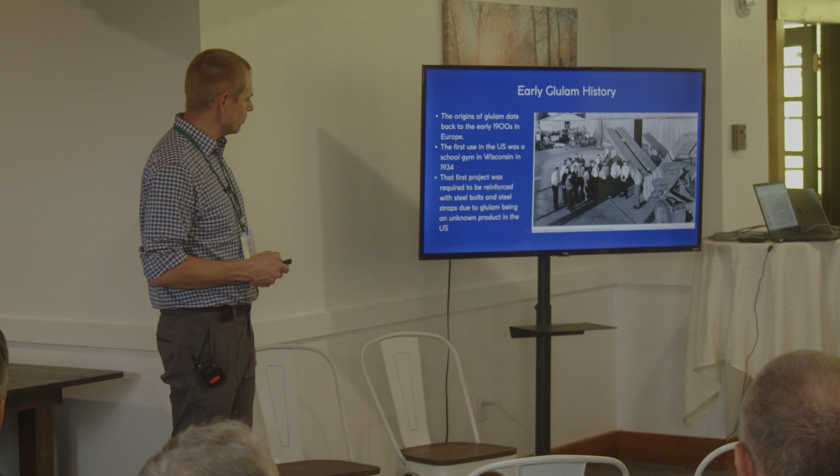So that's one of the first shots of the glulam arches being fabricated. This is that first building, that school gym, which, by the way, was built in 1934. It's still standing today. It was converted to a library at that same school in the 80s, but still functioning really well. So 90 years. Glulam's been used in the U.S. for 90 years. Pretty cool history.

This is just kind of showing you maybe the non-traditional mass timber buildings, like I showed at the beginning. These are more of the non-traditional mass timber uses, but still very traditional glulam uses, showing you the arches, curved shapes, doubly curved shapes. I'm working with a contractor right now who's working on an amphitheater project in California, very complex, doubly curved glulams. So you can do a lot with the material for sure.

In terms of the species that are traditionally used in glulam, it's really all of the same softwood structural species that we see used in 2x studs. And again, that's just because you're starting with those materials and then laminating them together. So southern pine, Douglas fir, spruce pine fir are some of the most common. Cedar is a common use when glulam is used in exterior applications. You can either pressure treat like a southern pine or use a cedar product for exterior applications.

We're going to focus a little bit and maybe get a little geeky, like I like to do sometimes, on how and why we might have different strengths of products.

Does somebody know where some of those samples ended up? They're over there. I'll take the smaller one, please. Thank you.

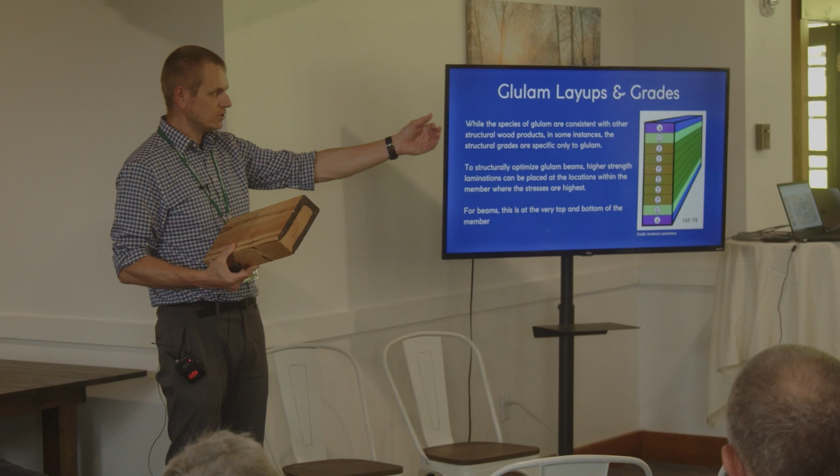So it makes sense to have highest grade lumber at the top and at the bottom for beams versus for a column. All of the stresses are the same throughout the size of that entire column, so using something that's more uniform makes sense there. And then the other sample there, it makes sense to have the same species and grades throughout because that's oriented flat-wise, so it's going to be the same load across the entire thing.

Right, yeah. Thanks, Andy.

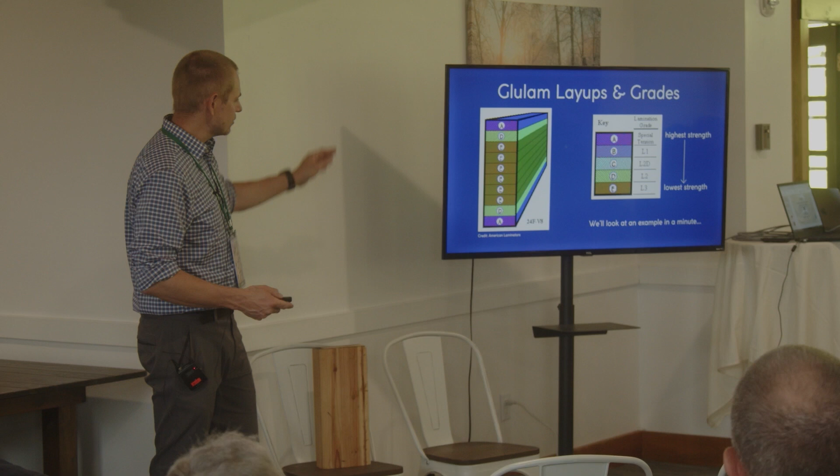So this is a Douglas fir glulam. This nomenclature here, 24F-V8, is just a way to identify some of the properties about the glulam. Won't go into the specifics here, but it kind of shows you, if you were to look at a traditional Douglas fir glulam, how would the different laminations stack up throughout that? So we're going to look at what A, D, E, all that stuff mean in just a second. But first I wanted to show those differences that I mentioned a minute ago.

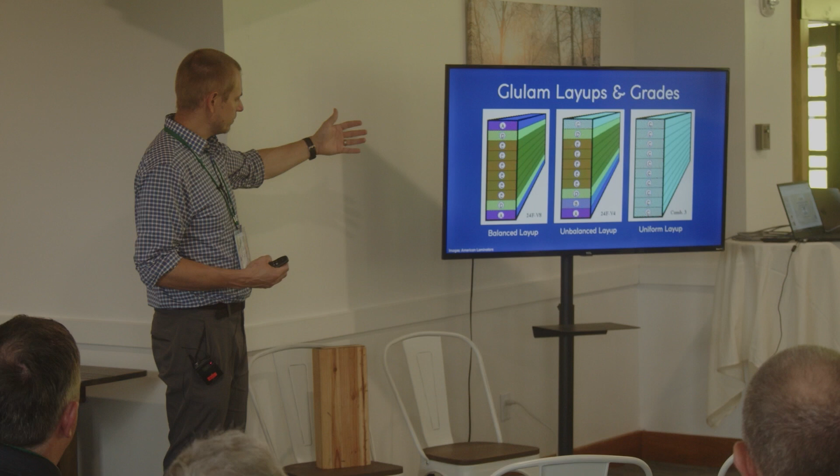If it's a beam versus a column, what is that? How do we optimize where the different strengths of lumber go? And as we think about the potential use for local species and local grades, that really is amplified because, what is the availability of all these different grades? What's the practical nature of a balanced beam versus unbalanced versus uniform layup? Because ultimately that feeds into what might be the best end cases or applications for local species that are going into glulam. So just a little bit to show you where each of these might be used best.

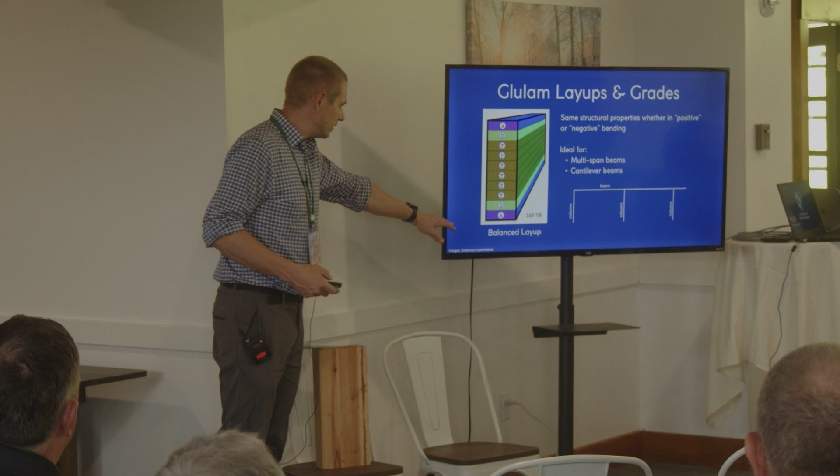So this is a balanced beam, basically meaning if you were to cut this thing right in the middle, what's on the top is exactly mirrored from what's on the bottom. It doesn't mean that it's uniform throughout, but you can see A and then D, A and then D, and then E. So it's exactly the same layup throughout. And what that is used best for is a beam that basically spans over multiple posts.

And the reason, because if it's just a beam that spans from one post to the next and the beam is cut there, it's always going to be bending. If you were to look at the deflected shape of that beam, it's always kind of like a smiley face, right? What we're really trying to do with the glulam is, I mentioned the stresses are highest at the top and the bottom. We're really trying to get the highest where the tension is. If you bend something like this, the top is in compression and the bottom is in tension. You're trying to pull the bottom apart, compress the top together.

So if it's doing this, basically the deflected shape would look something like it goes down here, then it goes back up here, down here, back up there. So it has tension at both faces, depending on where in the span you are. So that's why you would use a balanced layup. You want that high tension capacity at both the top and the bottom of the beam.

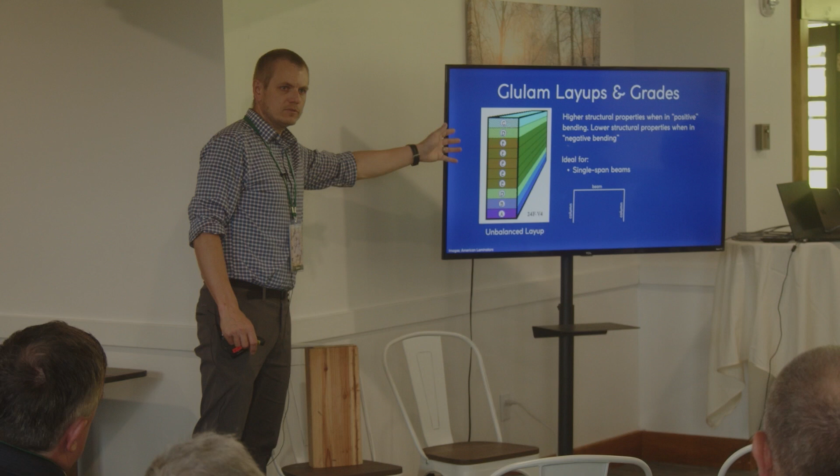Versus if it's just a simple span, like we said, between one post and the next, doesn't extend beyond, it's always going to be that smiley face. So the bottom is always going to be in tension. So this is an unbalanced layup, where we have the highest tension strength laminations at the bottom. The top is still a higher grade sometimes, but it's not as high as that very bottom. You just make sure you put it in the right way.

Yeah, they do come stamped with top on the top, and I have seen beams installed where you look up and it says top, and it's like, that's not the top of the beam. So yes, labeling and then proper installation is key.

And then a uniform layup, like I talked about, a column, that sample over there, something where you're using it in a plank orientation or a column orientation. You certainly can use this in a beam orientation, and I'll show the relative differences in properties, but this will have a little bit lower capacity than, say, a balanced or unbalanced beam, because you're using that same core lamination throughout the entire depth of the beam.

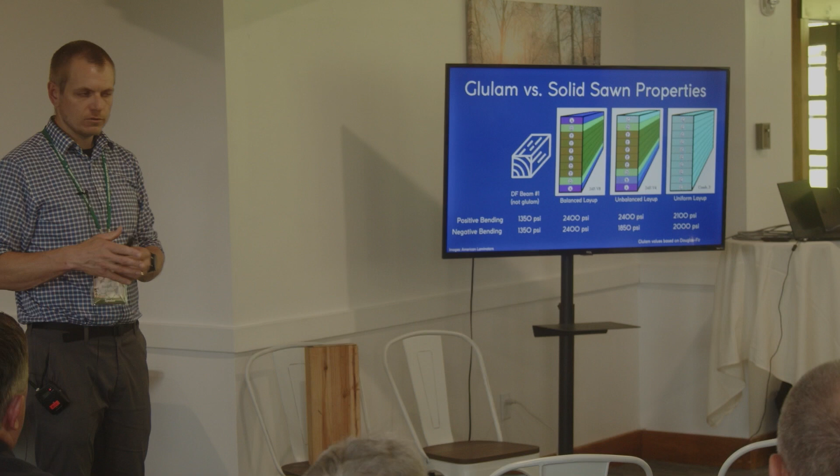Potentially. A couple of the reasons why there are these differences is the smaller the specimen of wood, the less likelihood that there are imperfections impacting the structural properties. Because, for example, knot size, wane, pitch, those things are respective to the size of the member. So there's limits on the sizes, the smaller the member is. So you have a bunch of small pieces, the imperfections on each are smaller, therefore when you lay it up, your net property is higher. So that's the main reason.

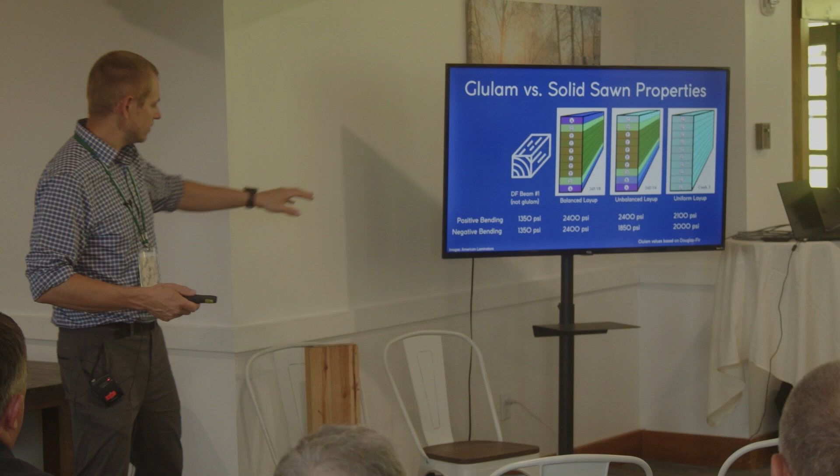So to answer your question, probably not, because this large solid sawn member is allowed to have larger imperfections, if you will. So the chance that any one small slice from that is going to have a large imperfection is higher. So the glue doesn't really have too much to do with the strength? Not a whole lot, no. It's mainly the properties of each of the laminations.

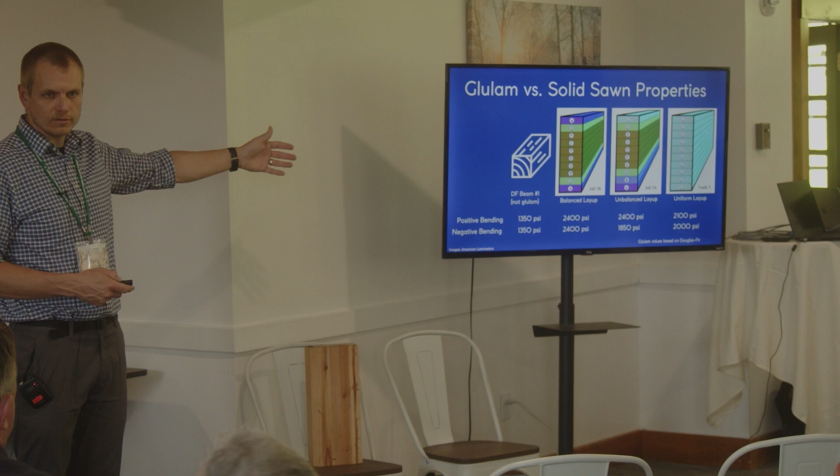The other advantage too is obviously you can create much larger sizes with a glulam, right? And longer, yeah, because they're finger jointed, exactly. So there's a couple of benefits there for sure. Smaller trees as well. Right, smaller diameter trees, because for a large column you don't need a large tree to do that.

All right, I'm going to speed up here so I don't take up too much time. If you were to use different laminations throughout, you'll start to see things like 302-20, N1D. If you go to your local lumber yard and say, I need a 302-20 stud, they're not going to be able to supply that to you. It's basically starting with #1 grade lumber and having additional requirements. For example, a 302-20 is a #1 dense lumber product with additional requirements for allowable knot size and location, allowable slope of grain, those types of things.

Basically, going back to your question about why there are differences: the more imperfections you take out of the lumber, the higher the strength is. So this is just weeding more of those imperfections out. N1D is just #1 grade dense lumber. N2M is #2 grade medium density lumber, which for most intents and purposes is just a #2 grade stud that you would find at your local lumber yard.

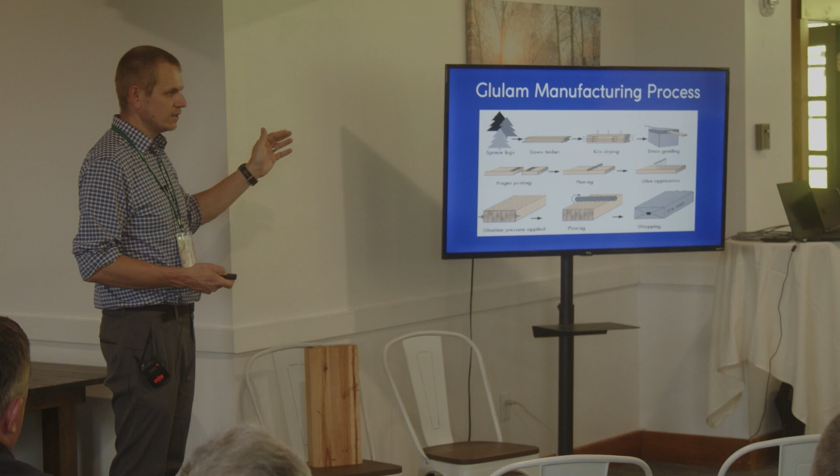How do we actually manufacture glulam? I've got a few pictures and one or two videos to show you. I'm going to show most of these going forward, so I won't dwell on this slide. If anybody's interested in a PDF of the slides, I know I talk fast, so I'm happy to share that too. So basically, it starts out with traditional lumber or maybe high-strength lumber, stockpiling a bunch of that. This is a glulam manufacturing facility in upstate New York, showing you the scale of the input lumber that goes in.

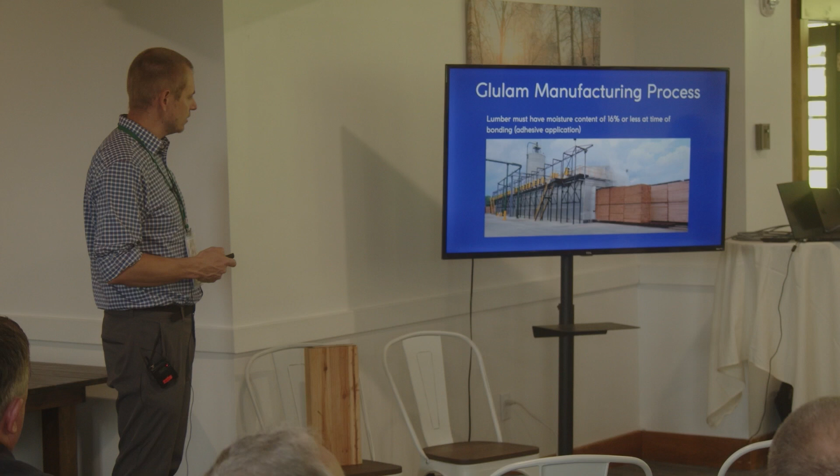The lumber is kiln dried. The glulam manufacturing spec says that the lumber has to be 16% moisture content or less at the time that it's manufactured, which is a little bit less. Traditional lumber is dried to 19%, so you do have to dry it down a little bit further, specific for the use in glulam.

Lumber is finger jointed. There was a comment earlier about how you can produce longer products, and this is why: each of the laminations in glulam is finger jointed, meaning you might start with a bunch of 8, 10, 12-foot pieces of wood, but you finger joint them to create a 40, 60-foot long glulam member, and you don't have to worry about the structural impacts of having just butt joints between those laminations. So it's finger jointed. Then it's put into a press.

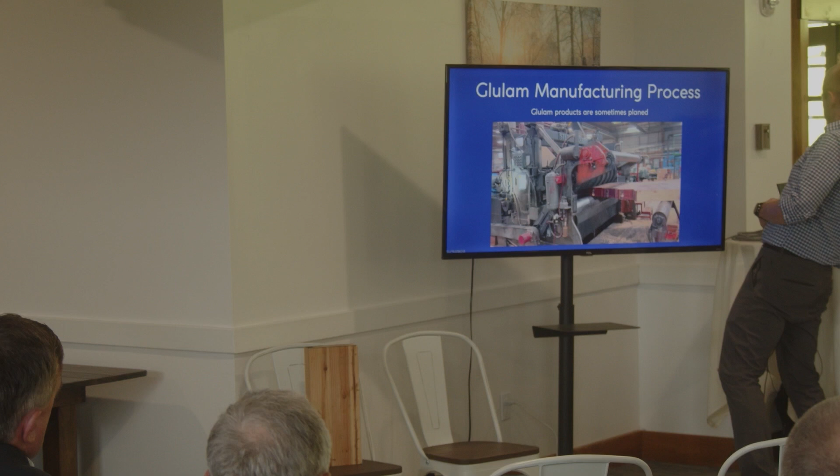I think this is a video. I'm going to try to play this real quick. Let's see if this works. Nope. I don't know if I have a mouse. Oh, there we go. Let's see if this works. I guess there's no sound, but that's okay.

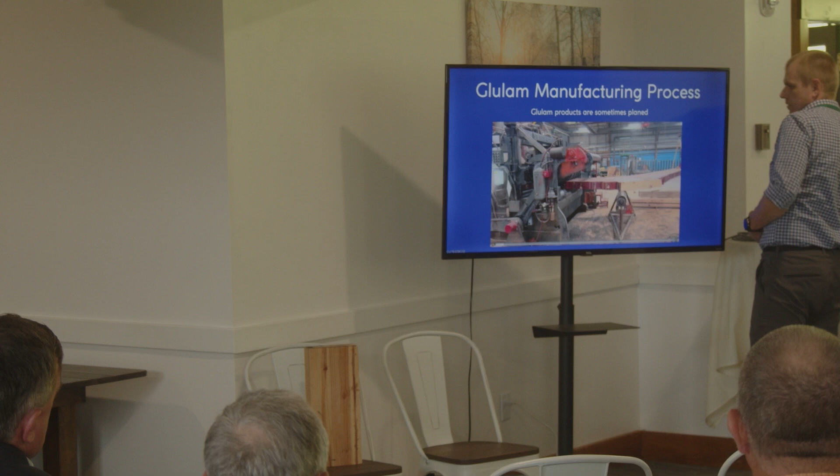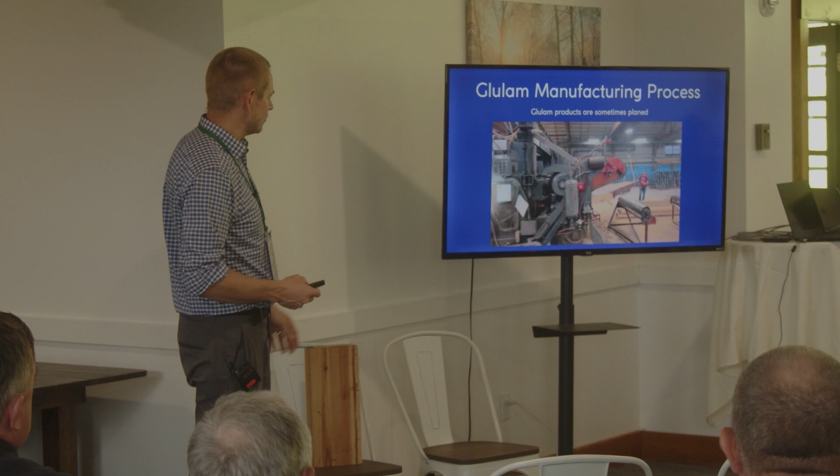So this is a planer. They're passing this glulam through the planing machine from one side to the next. It's a bit of a unique process for this one because this is a curved glulam, so they're kind of having to push it through and turn it as it goes. You can see the guy in the back. He's basically steering it, exactly. If you look closely, you can see the top surface of that glulam before it passes through the planer. It looks fairly rough.

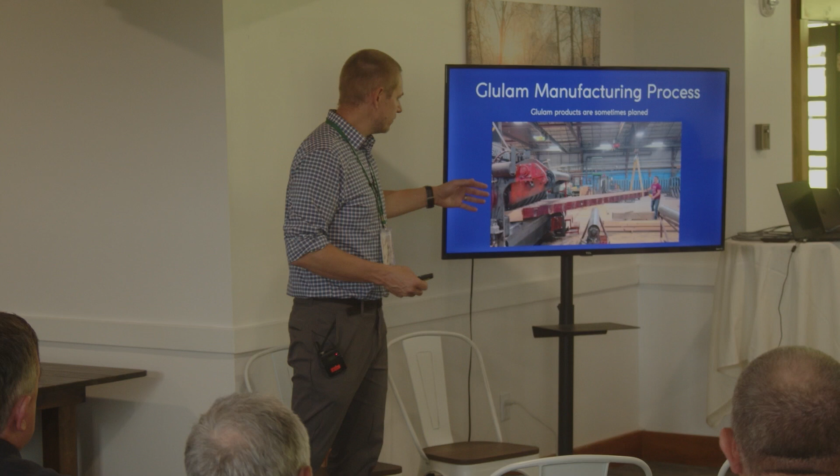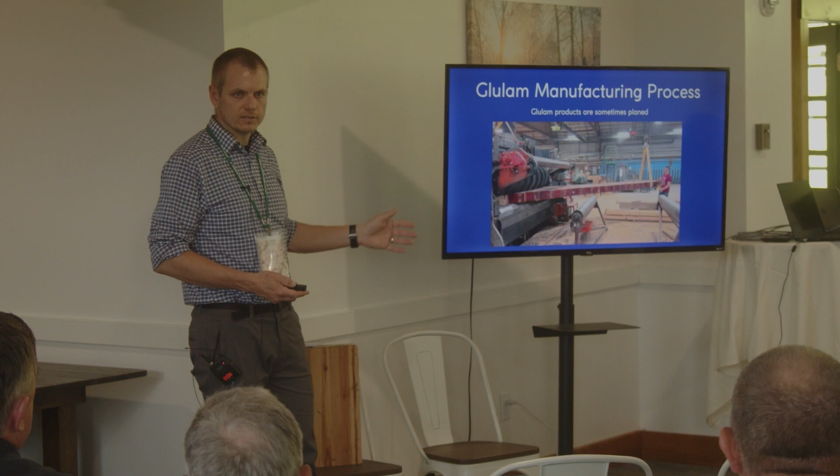And there's different appearance grades that you can get for glulam. This would be fine for a header in your garage, right? But it probably wouldn't be fine exposed for your school gymnasium. So that's how those things are varied, by the planing process and the appearance grade. So this would be like Unadilla? Yeah, that's who that was from.

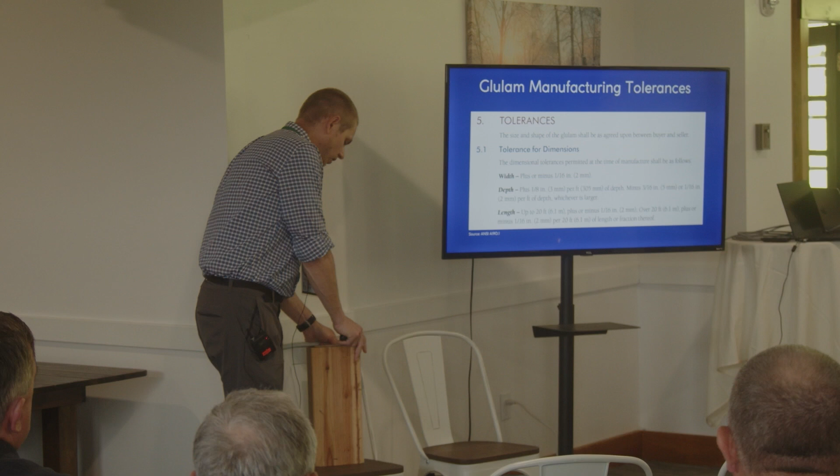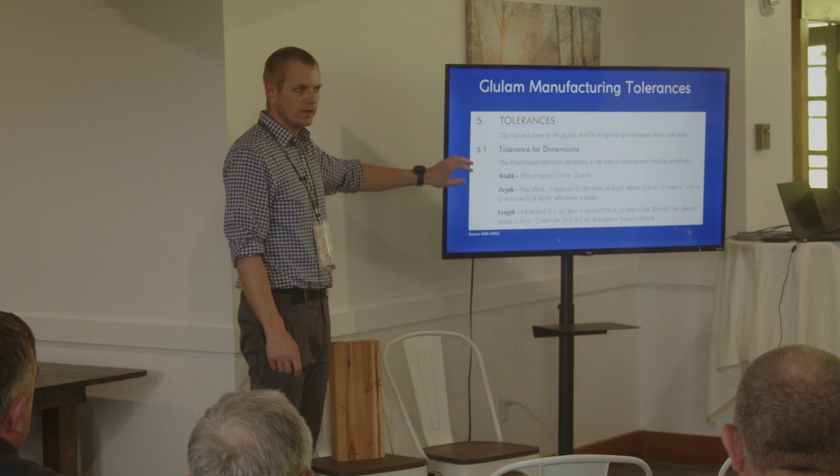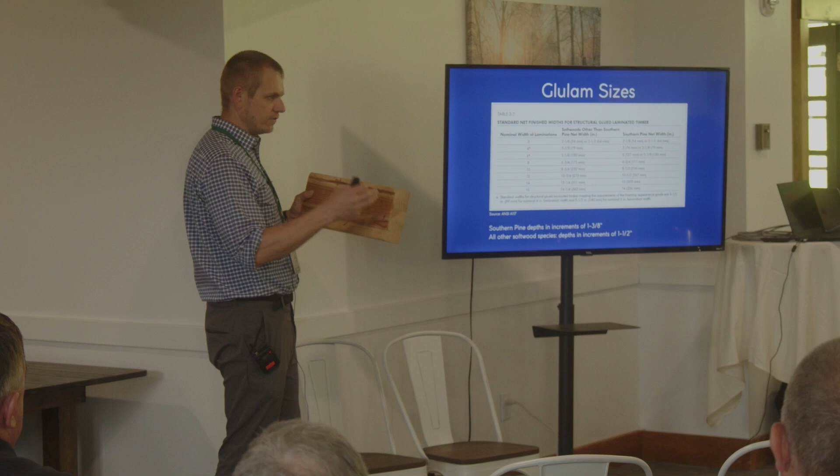Tolerances: there are fairly tight specs on tolerances. When you're creating a glulam member, the width needs to be plus or minus 1/16 of an inch. These are engineered wood products manufactured to fairly tight tolerances, all required by the production standard for glulam. Standard sizes of members are just a function of how many you're laying up together. Typically, you're starting with 2x4, 2x6, 2x8, et cetera, and you plane it down a little bit, which is why a 2x6 might end up at 5 1/8 as opposed to 5 1/2.

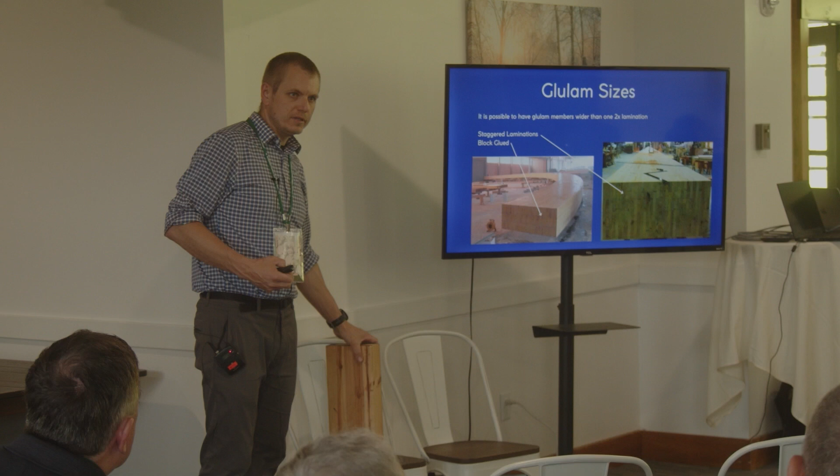You can create larger members, so you're not limited just to a 2x12 width. You can have multiple layers that stagger in the same line, or something called block glued, where you put another one next to this, glue between them, and press that. So that's called block gluing. This is a very large block glued member.

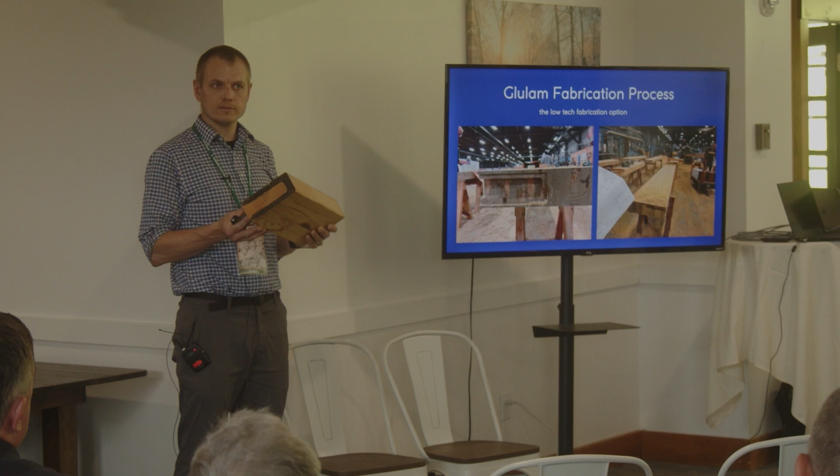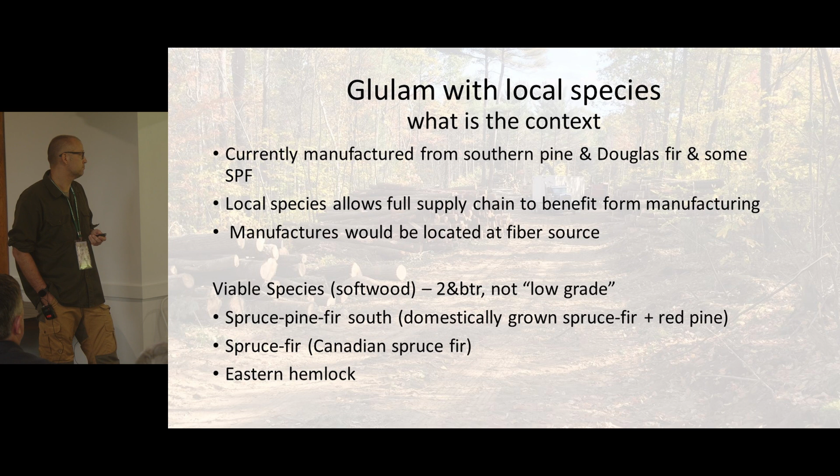And then eastern hemlock, and this is the underdog, but eastern hemlock can be dried and can get put into glulam. So we're trying to look at the right applications for that material, and we could talk about that. Again, current manufacturing's mostly in the Pacific Northwest and the South, close to where that supply is, and then a little bit up in Canada.

And then there's some regional manufacturing, and that tends to happen when those manufacturers are selling higher value or higher margin products. So if there's more customization, there's more opportunity for manufacturers here to carve out a niche. Whereas if it's just a commodity glulam product, the South and Pacific Northwest currently are where all that's manufactured, or Canada to some degree.

So the big thing we're thinking about: there's an assumption, and a great assumption, entirely right. As Ricky pointed out, if you're making a beam, that's going to reflect the design values, the strength characteristics of the wood you're using. So if you make a beam out of spruce pine fir south, we know it has lower design values, less strength. When you glue the same number of laminations together, that's going to have less load-bearing capacity.

So that's the assumption, and oftentimes folks go, oh, we can't do glulam out of local species because it's not as strong as these other species. That's entirely valid, but what we're looking at is trying to understand if it's strong enough for the use. So we can manufacture something that's not as strong, but can it occupy a niche and serve a specific role?

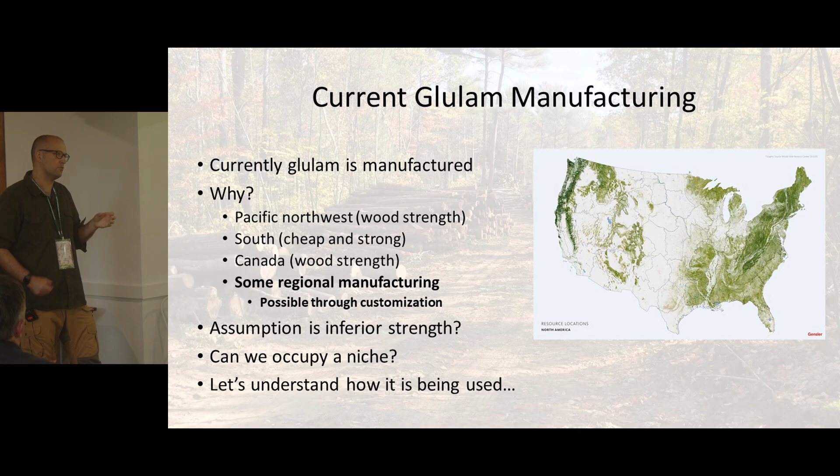Right now, everyone's going into the store and saying, this will never work, we need the strongest wood. That's fair, but there's an application for these local species where it's strong enough, and in those cases, we can carve out a niche. That's the thesis, at least, that we're working through.

Could you comment on the differences amongst glulam, microlam, and whatever MacMillan Bloedel calls their version? Do you want to handle that one?

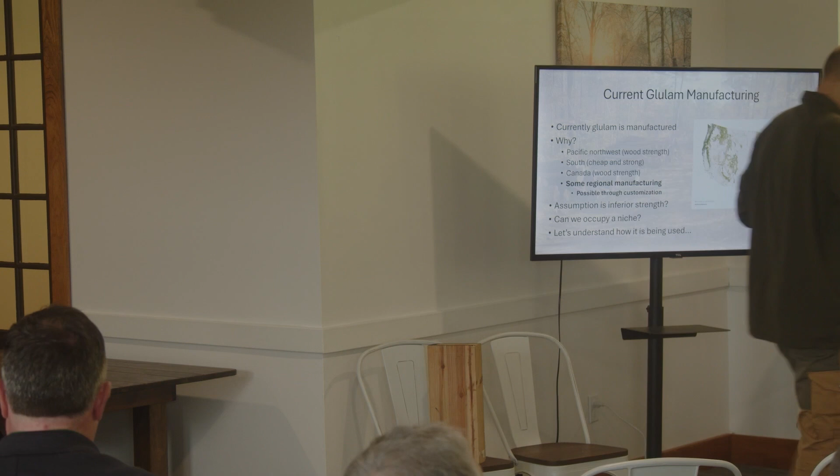Yeah, I'm not sure about the last one you mentioned, but the microlam is a product called LVL, which is laminated veneer lumber, and it's slicing down wood to small veneers, you know, 1/16, eighth of an inch veneers, and then laminating those together. So that's the main difference, is whereas this glulam is using 2x dimensional lumber, that's using veneer-based products. From a structural standpoint, they're fairly similar properties.

Like an LVL, because you're slicing it down even smaller, small properties, less defects. Usually, let's compare just numbers-wise, 2,900, 3,000 is the allowable bending versus a glulam 2,400. So it's a little bit lower properties, but we can use local species in glulam where we might not be able to in something like an LVL.

Oh, PSL, yeah, parallel strand lumber. Similar to LVL, yeah. You're not using sheets of veneer, you're using small strands of lumber. But again, you're breaking it down into very, very small pieces and then laminating it together.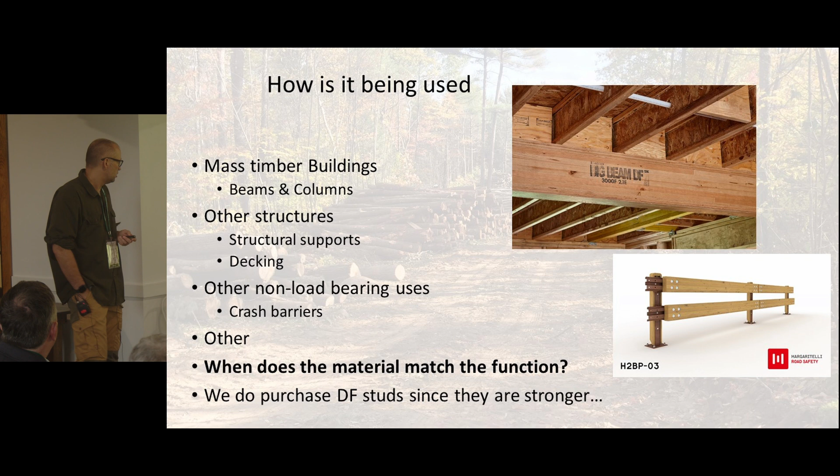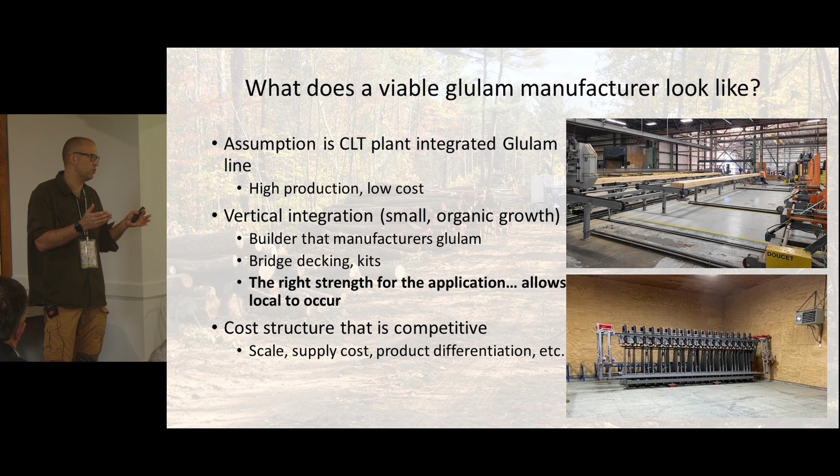But we also need to make sure when we're talking about this and trying to develop the market that it's not just a pipe dream. It always has to come back to being a cost competitive product in the market where it's functioning. And so we're constantly going back to that. Can this be competitive? How do we make it competitive? What are the uses? What are the niches? And supporting those businesses in those applications. And then more entrepreneurs and smart business people understand how to adapt and scale that into other areas.

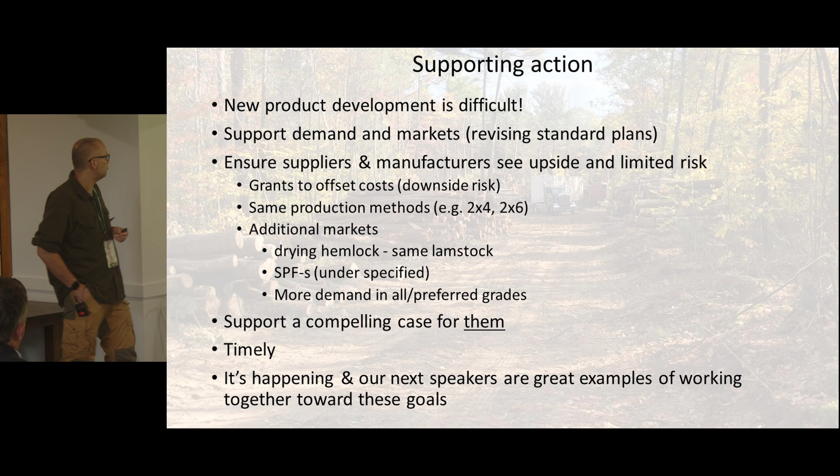So how are we trying to support some of these efforts? Well, it's really supporting, I mentioned before, new product development, really difficult. We heard about that earlier. A lot of different actions we're hoping, which in aggregate will support the development of this market. So at its core, it's supporting demand in markets.

So currently, with glulam, just as we talked about SPF, people automatically go, oh, we should have DF studs. All the specifiers, or most of them, as I've seen, tend to specify Douglas fir or southern pine. And so we're in this chicken and egg scenario where we're trying to develop a product with a new species, different species that's not being used, but no one would know about it or specify it.

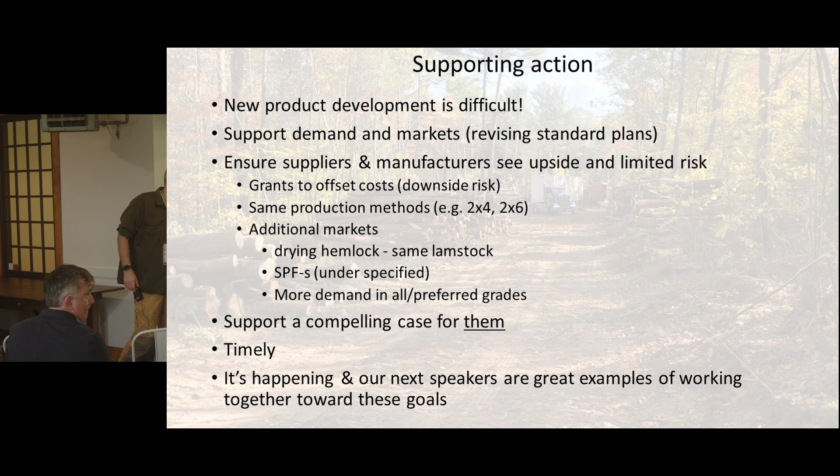So how do you get the demand, right, for this product? Why would someone specify a product that's not being made right now? Oh, yeah, Marina. I wonder if you see the Buy America requirements helping.

I don't necessarily think so, because they could get that certification for southern pine and Doug fir. So currently it's domestic, but it would push out the spruce pine fir glulam. That could help if the construction project also has CLT in it. If you have a difference in species, it looks visually different. So if the columns look different than the panels, people go, oh, this looks different, I want it all to look the same. Yeah, there could be an advantage there.

Yeah. So right now, at the same time as folks are getting certified, we're trying to help work to revise standard plans. So standard bridge plans, standard structural plans that towns can pull off the shelf for situations where they're putting in a new building, or NRCS has farm buildings where they have glulam. If New Hampshire, Vermont, Maine NRCS can integrate those local species into those plans, then we have some sort of demand draw, right? So people know they can specify this at the same time that people are getting it certified. Basically getting the demand and supply going at the same time. Difficult, but that's the effort.

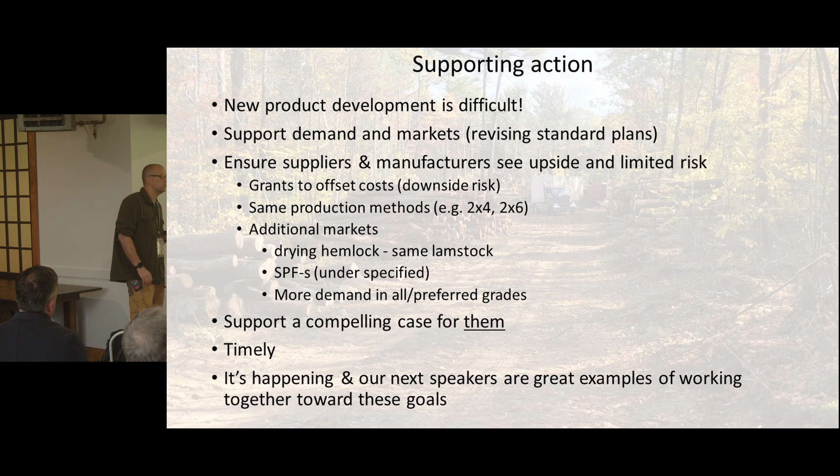But yeah, I don't know if you or even Ricky, rather than the plans stating the species, just state the performance that the glulam has to meet. That way it's agnostic, as long as you meet the performance, because that's ultimately what matters: is it strong enough, is it stiff enough? Right. Yep. So any advice on how to do it? Right. Yeah, we're working.

Yeah, so grants, this is a huge part. Oftentimes the manufacturers can deploy a certain amount of capital, and having a local glulam product may not be where they jump to immediately. So helping to incentivize that process could be a good decision, but it may be a better investment for the regional forest economy than it is for the specific business. So if we have grants that can help mitigate that downside risk where they only have potential upside, then it makes it a much more compelling investment for them. So grants are really important, just making sure it's the same production methods, not changing anything in terms of the lam stock and supply,

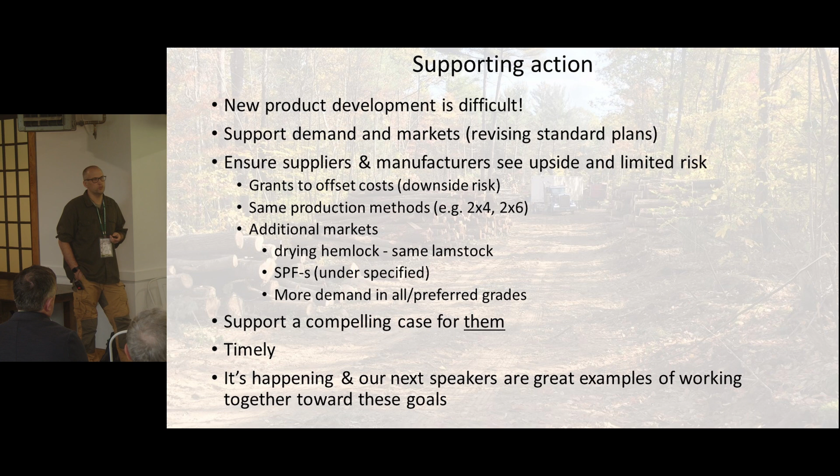having additional markets. We're trying to do similar things with cross-laminated timber. Having that complementary product just allows the suppliers to have more confidence in wanting to supply these markets. For instance, the challenge we have with Eastern Hemlock CLT is that we don't know when the next Eastern Hemlock CLT building is going to be built. Whoever's providing that lam stock, there's some amount of loss of Eastern Hemlock as it's being dried. They need to overestimate for a specific job, and they'll have extra material, and that's just a loss for them. By having another market, they can sell it to the glulam manufacturer, or the next building, and so on. So with additional markets such as glulam and CLT, you can have that product develop with less risk, less cost.

And then, more demand in all preferred grades, so that's important, though again, it's the low grade issue, so I'm not sure the low grade lumber gets into it. And an important part is making sure it's a compelling case for them. I find again and again, I go to someone that has a forest products business and say, hey, you should do this, because it's good for all of us, but it has to be good for the business. That's where it all starts. Then create a structure where that business is incentivized and all of us can come along for the ride for the greater good. And making sure it's timely, and that's something Lance and the Conservation Fund have been incredible about, and I'll let him talk a little bit more.

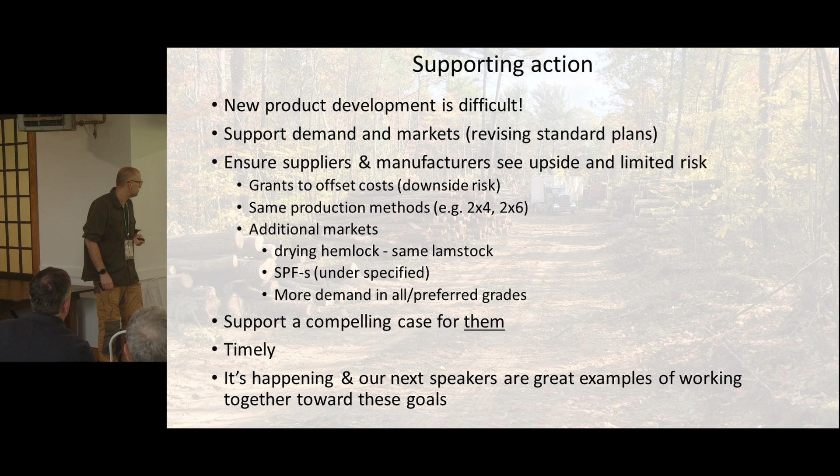But oftentimes with some of these businesses, there'll be a discrete point in time where they can act to capture a market. A lot of grant cycles work on 12 months, 18 months. So it's like, Andy, we could do X, Y, and Z right now if we were certified, in the next 3 months. It'd be nice if a funder recognized that, and then you could act on it as opposed to saying, let's check again in 18 months or 12 months. But it's happening, so we're moving forward in terms of glulam with local species, and I'll pass it on to our next speakers to talk more.

See, we're going like this.

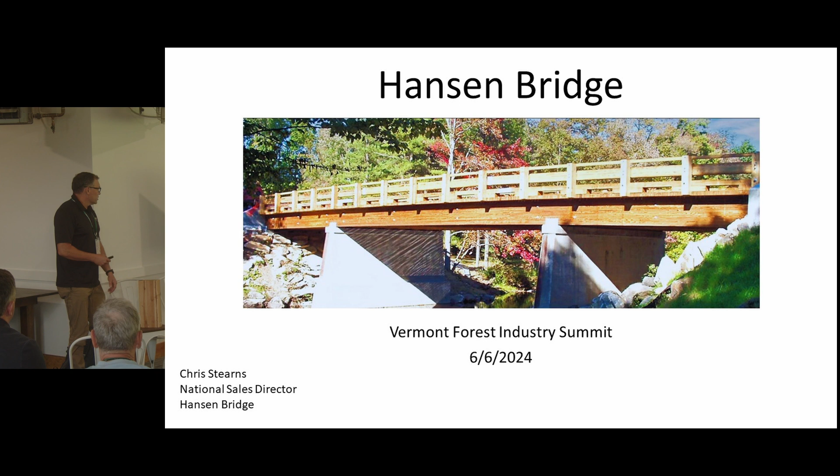And we're trying to, let me see, is this right? That picture that you had before is, I think, our machine. This is just showing the whole setup, to show you how the process works. Basically, this is a Doucette press, it's called, and the lumber is just fed in from the end. We typically use 2x6s, and it's a pretty simple machine, really.

We're just basically doing straight stock. We don't do any finger joining, so we're kind of limited by the size of the press and also the availability of the timber. It's kind of hard to find 24-foot 2x6s that are much good. So what we've got right here is an example of a 12-foot long beam, and it's a 4-foot press, but this ends up being 30 boards, so we're about 3 inches short, just because everything's bowed and to get the glue and everything in there.

So basically, the boards come through. That is a glue head that it rolls through, and it automatically applies the glue. We use a 2-part structural adhesive from Loctite, and Henkel is the company. And there's a lot of different steps involved. You have to weigh your glue. So you do some test runs where you weigh the actual glue, and that helps determine your set times.

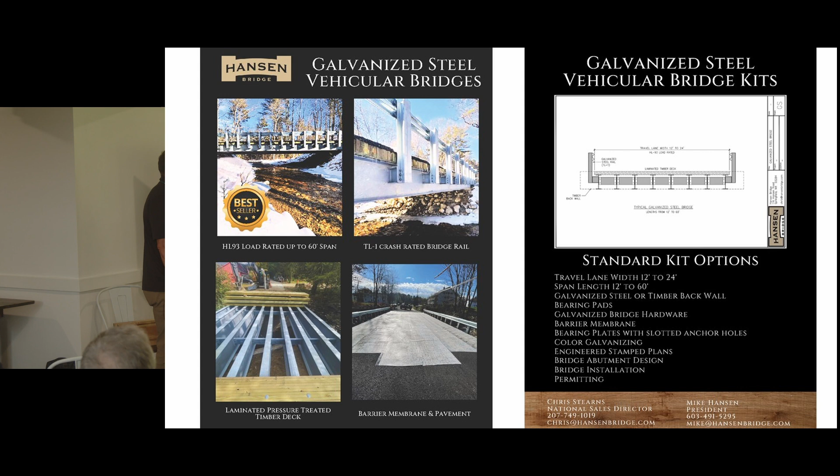So I think ultimately there's potential for some good volume. So that's kind of what we're doing. And this is just an example of what these galvanized steel stringer bridges look like, where you see the ends of the boards. That's really all you see on these ones. You can utilize wooden rails to get a little more wood involved. We sell a lot of these; we do 10 to 15 a year just in New Hampshire, with a couple into Vermont too.

This not so nice weather has been actually helpful. I hate to say it, but these little residential bridges and things.

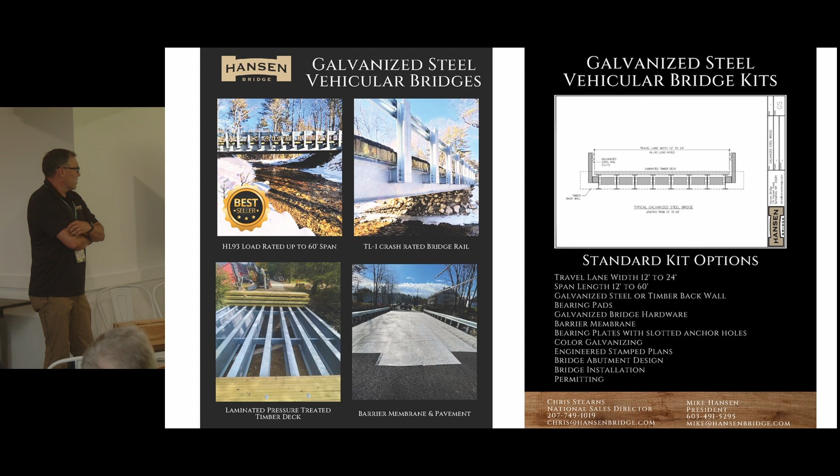Yeah, and that's one of the benefits of this scenario. We prefab as much as possible, so we can basically come in 2 to 3 weeks, put a bridge in. And that includes pouring footings if necessary, or abutments if necessary, depending on the load ratings and what's existing on site. So this whole kit concept is pretty exciting, and I think working with the local species, it's definitely got the potential to be something.

So, yeah. What local species are you using? Oh, well, we're not yet, that's the thing. Right now we're not, because it's not actually certified. What is the SPF? Yeah, because the hemlock requires incising before you pressure treat it, and we don't have that equipment. So there is that potential though, with some of these grants, looking down the road, we can get into more complicated items, like planing. Because right now, these just come out and you can lay them down, and either just do a wear coat or pave over them. But ideally you want to get into the architectural stuff, but that's going to require more advanced equipment to do the planing of the surfaces to get that architectural grade. So that's the plan, hopefully.

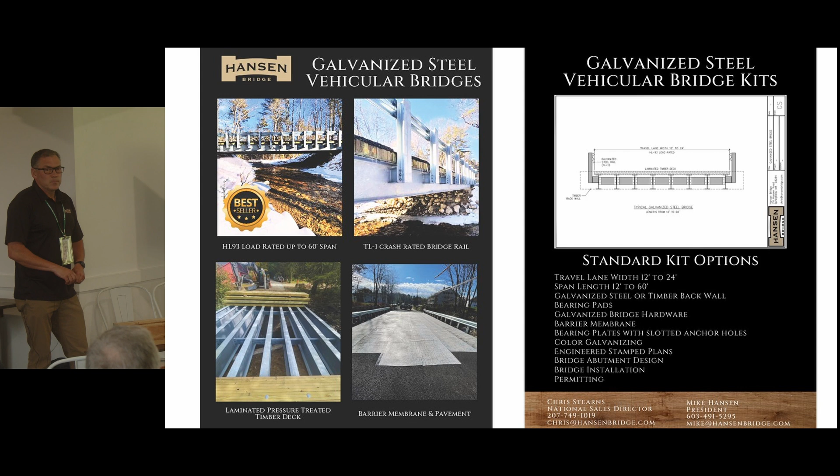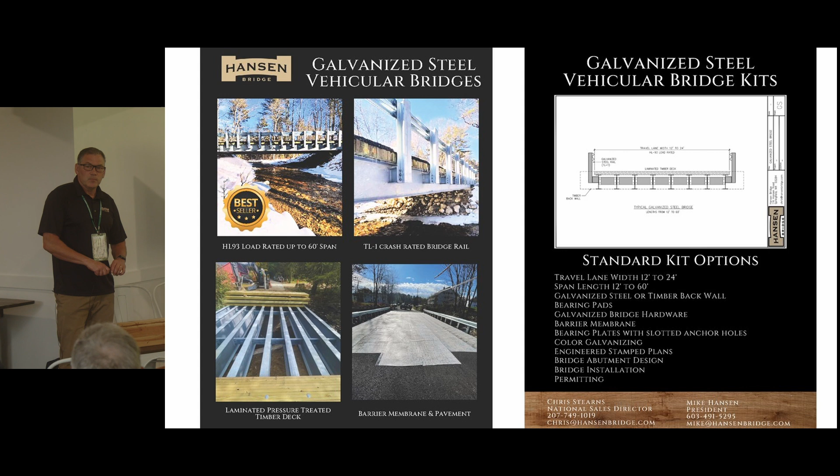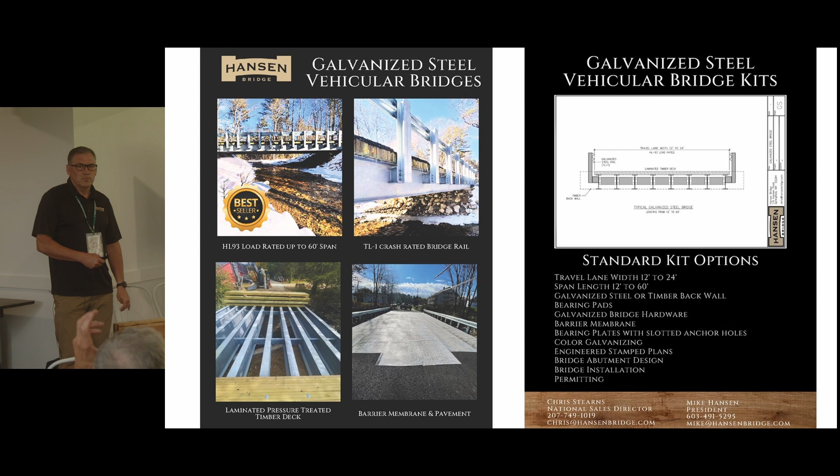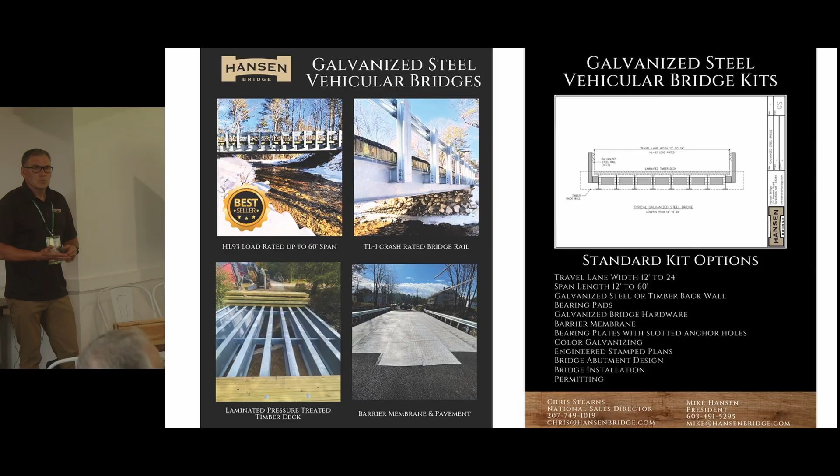How does the SPF take preservative? I've heard that southern pine soaks it up really well. Oh, it does, yeah, for sure. To incise it to do it. Is it comparable to southern pine in absorbing, or are there different issues? No. It should be about the same as far as absorbing the materials, but SPF, I'm thinking spruce, pine, fir. Pine, eastern white pine? All right, so eastern white pine's out of the picture. Yeah, I'm not sure, as far as what we're doing. It's a big component of what grows here. Yeah. The higher market value for white pine is the aesthetic, not the structural aspect. Doesn't treat well either. Okay.

Yeah, so they've looked at that a bunch, and the design values are less, the cost is more just for the raw material because it has higher values, and then also most of our pine mills are cutting 1-inch boards, so they'd really be shifting what their market is, and those kinds of things can be huge barriers. So if we can take existing dimensional mills doing 2x6s or 2x4s and just provide one more outlet, something very small for them to adjust in order to access a new market, that's kind of the first step. Yeah, we're right across the street from Durgin and Crowell, and all they do is 1 inch trim. They're literally across the road from us.

In Maine, a lot of the dimensional mills don't want to process red pine because the lumber markets look at it and think something's wrong with it. But that can be an opportunity to get those processed and use them in applications like this, because it does treat well. Yeah, and in our area there's a lot more demand around Lake Sunapee. There's a lot of money on that lake, and the people don't mind spending more. I think the whole grown in New Hampshire thing, there's actually some value to that with some of these customers. It's gotta be pressure treated to do what you're doing? For this, yes.

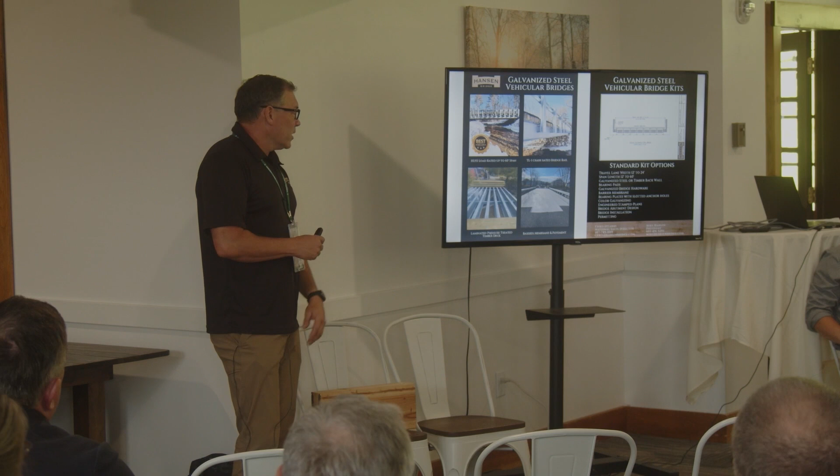Yeah, and if anybody's ever coming down 89, you're welcome to swing in and I can show you around, check the place out, see some of the equipment. It's kind of cool to look at.

And I should also mention, we have some of our friends here, and so much of the research, we're the beneficiaries, everyone in the region, of all the great work they've been doing for decades, right now with the composites lab and all that. Shane could probably do the whole presentation on the catalog. A whole pile of R&D around the late 90s, early 2000s on hemlock and SPF layups, glulam, and then reinforcing with structural fibers as well. Those were for infrastructure, bridge beams and things like that. Oh, wow.

There were some bumps in the road in the past, but sometimes it's nice to come back to these ideas. There's different markets, different situations, and we expect some manufacturers to be able to do it. A lot of times it's just finding the right market niche. The niche of going into federal highway infrastructure wasn't the right niche. But something like this definitely. Yeah, the federal projects, we avoid that. Yeah, FHWA.